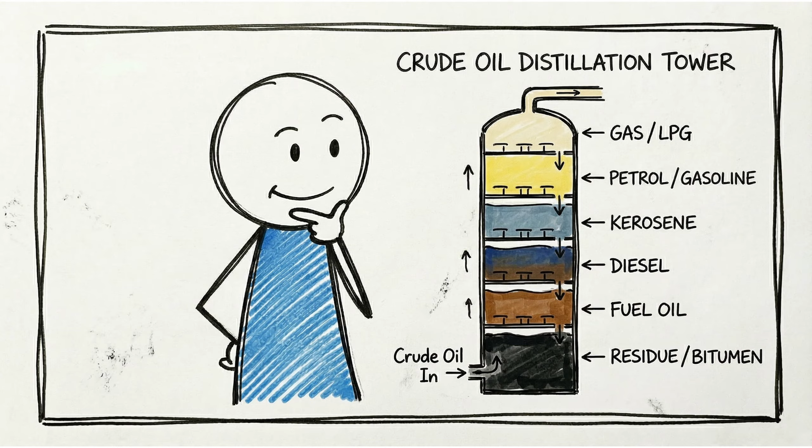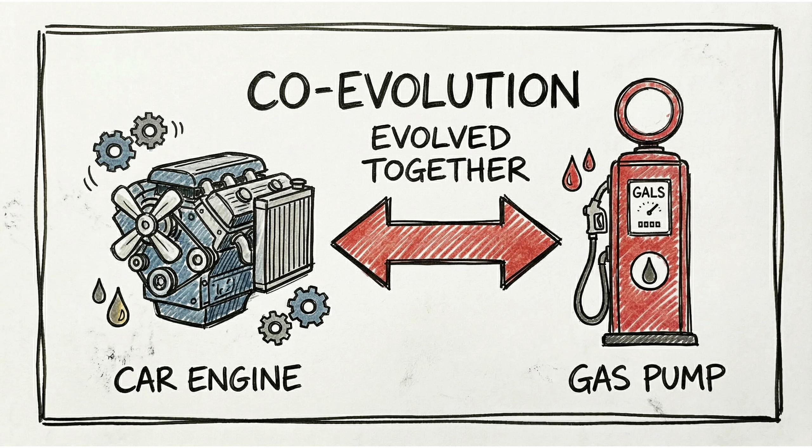Gasoline sits in the lighter range of those components, which makes it highly flammable and energy-dense. It powers the vast majority of passenger cars on the planet and has done so for over a century. The internal combustion engine and gasoline essentially grew up together, each one evolving to suit the other.

Different grades exist, measured by octane rating, which determines how well the fuel resists premature ignition inside the engine. Higher octane fuels handle higher compression without knocking, which is why performance engines often require premium grades. Despite the rise of alternatives, gasoline remains the dominant transportation fuel by a significant margin.

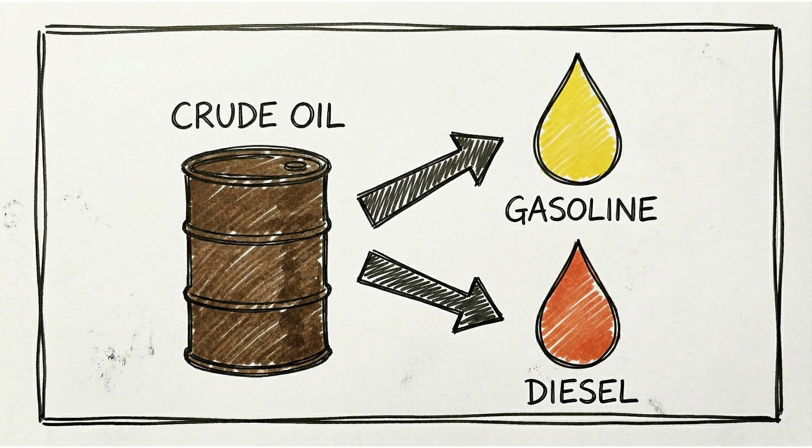Diesel. It comes from the same crude oil as gasoline, but behaves very differently. Diesel is heavier, less refined, and ignites not through a spark, but through compression alone. When air inside a diesel engine is compressed to a high enough degree, it heats up enough to ignite the fuel on contact. This makes diesel engines more thermally efficient than gasoline engines, meaning they extract more energy from each unit of fuel.

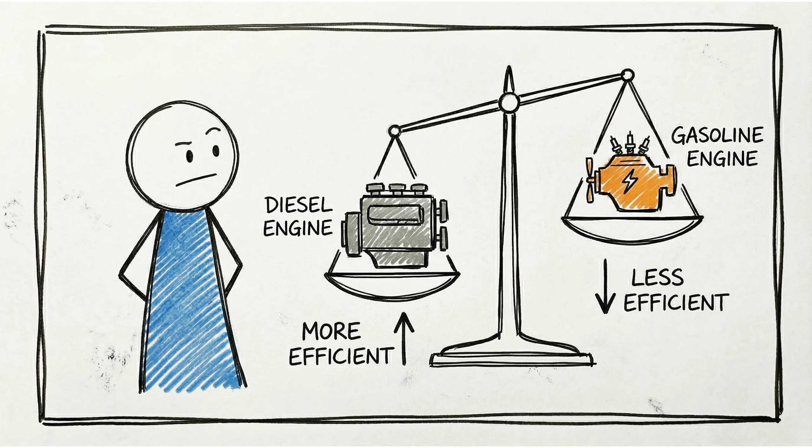That efficiency is why diesel became the standard for trucks, buses, trains, and ships, where fuel economy over long distances matters enormously. Rudolf Diesel, the German engineer who developed the engine in the 1890s, originally envisioned it running on vegetable oil. The fuel we now call diesel came later, refined to suit the engine's characteristics.

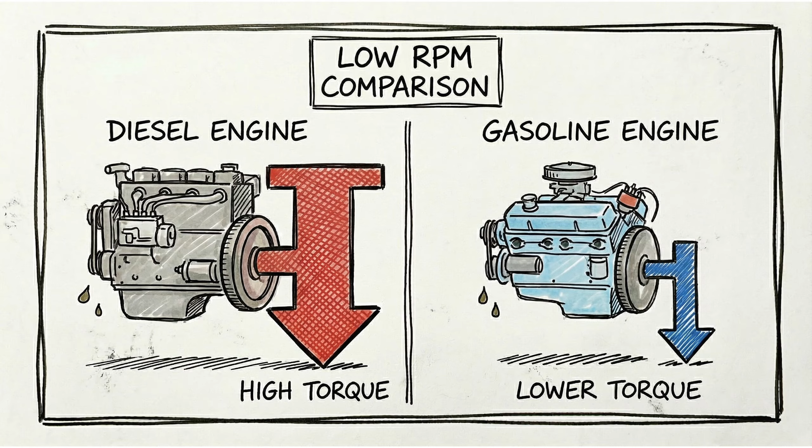It produces more torque at lower speeds than gasoline, which is another reason heavy vehicles favor it. In many parts of Europe, diesel passenger cars became extremely common before emissions concerns began shifting the market away from them.

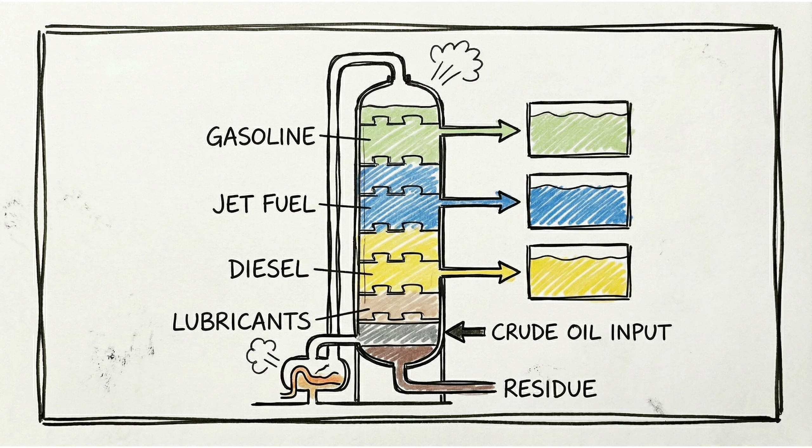Jet fuel. Commercial aviation runs almost entirely on a fuel called Jet A, a type of kerosene refined from crude oil. It sits between gasoline and diesel in terms of its weight and composition, but it has specific properties that make it suitable for the extreme demands of aircraft turbine engines.

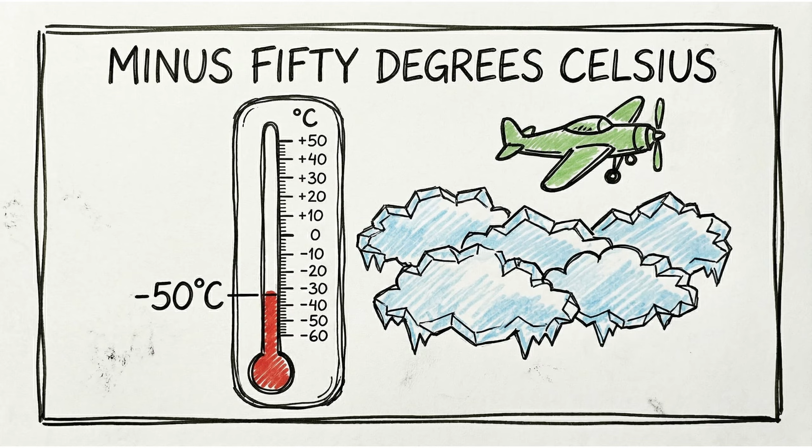It has a very low freezing point, which matters when aircraft cruise at altitudes where outside temperatures can drop to -50 degrees Celsius or colder. It is also stable under pressure and resistant to vaporizing at altitude, where atmospheric pressure drops significantly.

Military aircraft sometimes use a slightly different variant called JP-8, which has additional additives for safety and performance. The energy density of jet fuel is one of its most important qualities, since every kilogram carried on an aircraft comes at a cost to range and payload. The entire global aviation network, moving millions of passengers every day, depends on a continuous and precisely refined supply of this single fuel type.

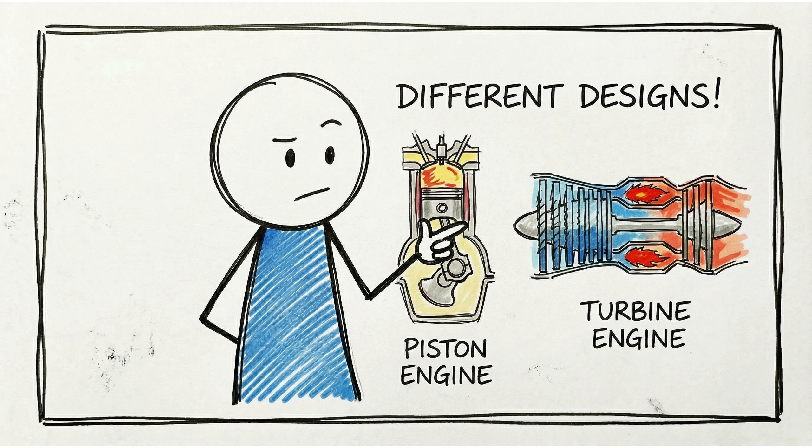Aviation gasoline. Not all aircraft run on jet fuel. Smaller, propeller-driven aircraft typically run on aviation gasoline, commonly known as avgas. It is a high-octane fuel specifically formulated for piston aircraft engines, which operate differently from the turbine engines found in commercial jets. One of the most widely used variants is avgas 100LL, where LL stands for low lead.

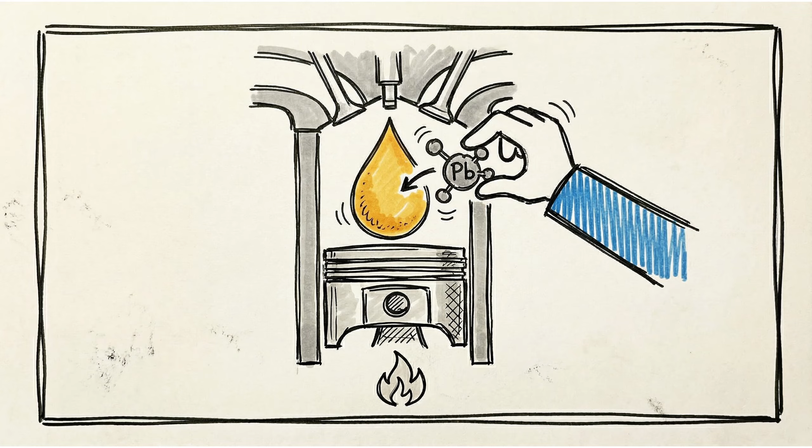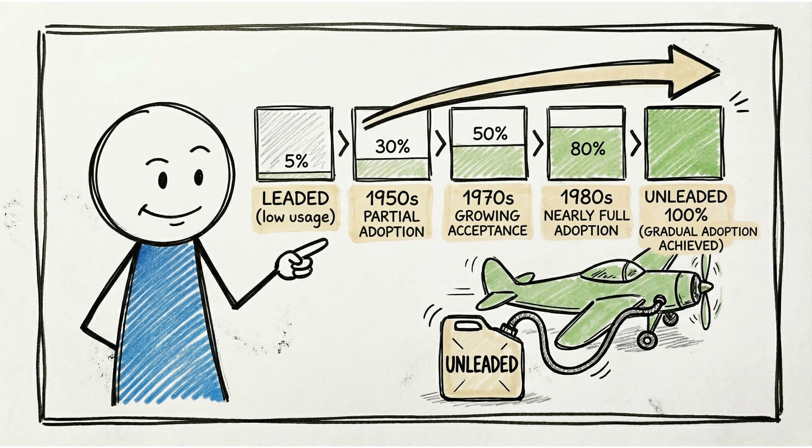It still contains small amounts of tetraethyl lead, an additive that prevents engine knock in high-compression piston engines. Lead was phased out of automotive gasoline decades ago due to environmental and health concerns, but the aviation industry held on to it longer because finding a suitable replacement that works safely across the wide range of piston aircraft engines proved technically challenging. That challenge is still being worked on, and unleaded alternatives are gradually moving toward wider adoption across the general aviation sector.

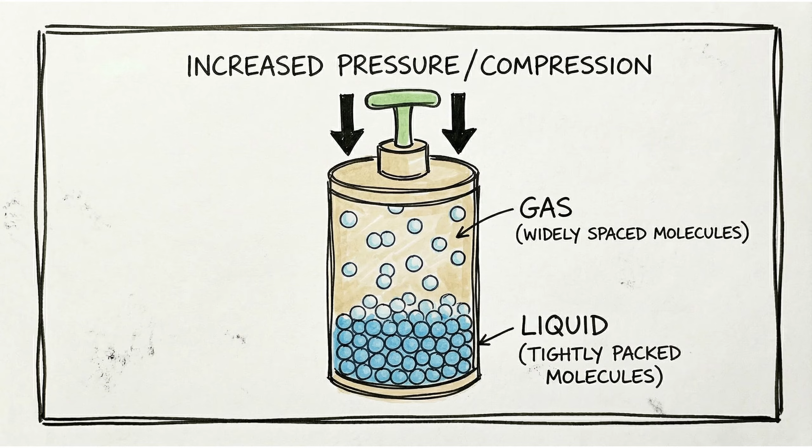Liquefied petroleum gas. Sold under names like LPG, propane, or butane depending on the specific composition, this fuel exists as a gas at normal atmospheric pressure, but is stored and transported as a liquid under moderate pressure. That property makes it practical to bottle and distribute without the need for pipelines.

Propane is widely used for heating homes, cooking on grills, and powering forklifts and other industrial equipment. Butane is commonly found in portable camping stoves and lighters. In some countries, LPG is also used as a vehicle fuel, sometimes called autogas, and it burns more cleanly than gasoline, producing lower levels of certain pollutants.

It is produced in large quantities as a side effect of other energy operations. Its versatility across cooking, heating, and transportation makes it one of the more quietly useful fuels in everyday life.

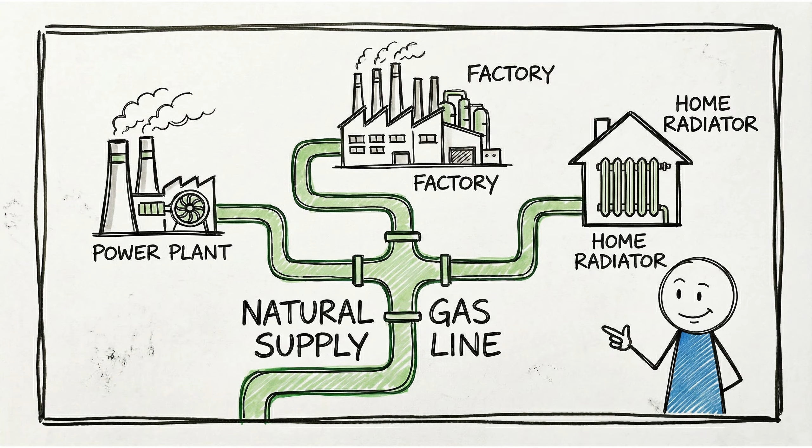Natural gas. It is found underground in vast reservoirs, often alongside crude oil deposits, and has become one of the primary energy sources for electricity generation, home heating, and industrial processes worldwide. Natural gas is composed mostly of methane, the simplest hydrocarbon molecule, which burns more cleanly than coal or oil and produces less carbon dioxide per unit of energy released.

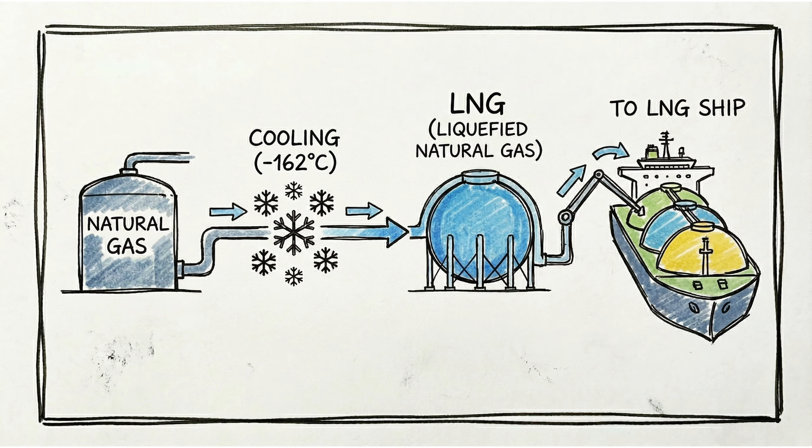It is transported through extensive pipeline networks that span continents, and in places where pipelines are not practical, it can be cooled to extremely low temperatures to become liquefied natural gas, which can then be loaded onto specialized ships and transported across oceans. Compressed natural gas, known as CNG, is used as a vehicle fuel in many countries, particularly for buses and fleet vehicles, where refueling at a central depot makes the infrastructure practical.

Natural gas became the world's fastest-growing fossil fuel over recent decades, largely because of its lower emissions profile compared to coal. Hydrogen.

It is the most abundant element in the universe and produces nothing but water vapor when burned, which makes it one of the most discussed potential fuels for a cleaner energy future.

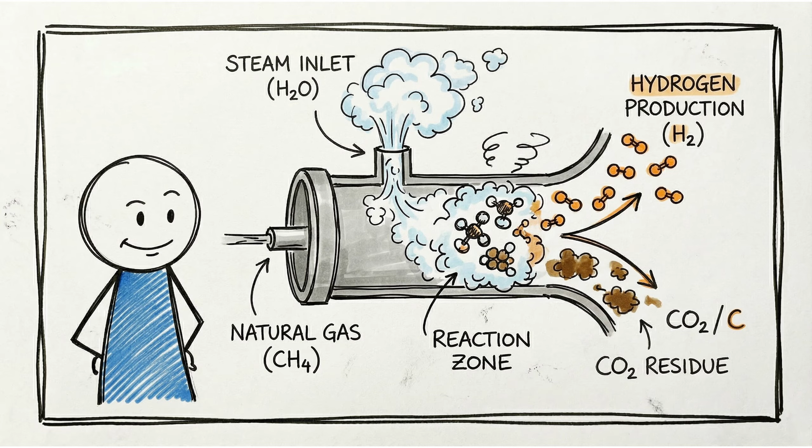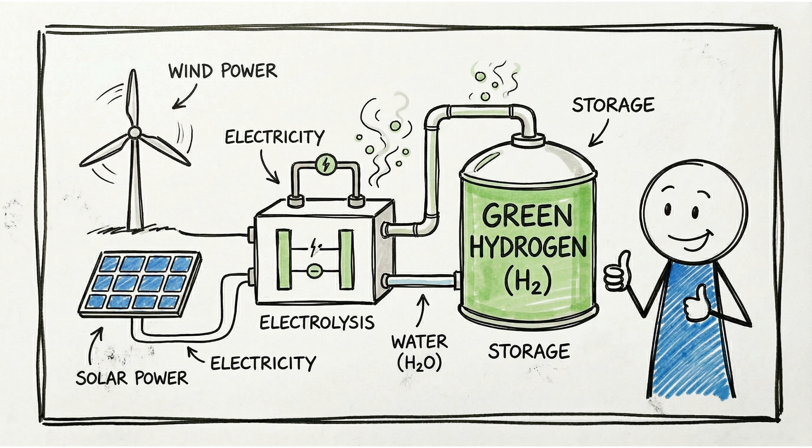Hydrogen itself does not occur freely on Earth in usable quantities and must be produced, most commonly by splitting it from natural gas through a process called steam methane reforming, or by using electricity to split water molecules through electrolysis. When the electricity used for electrolysis comes from renewable sources, the resulting hydrogen is called green hydrogen and carries essentially no carbon emissions across its production chain.

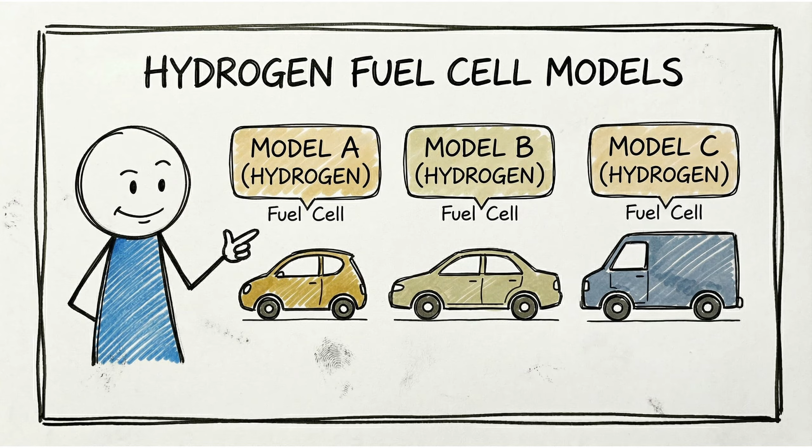Fuel cell vehicles use hydrogen to generate electricity on board, with the only exhaust being water. Several car manufacturers have developed hydrogen fuel cell cars, and the technology is also being explored for heavy trucks, trains, and ships where battery weight becomes a limiting factor.

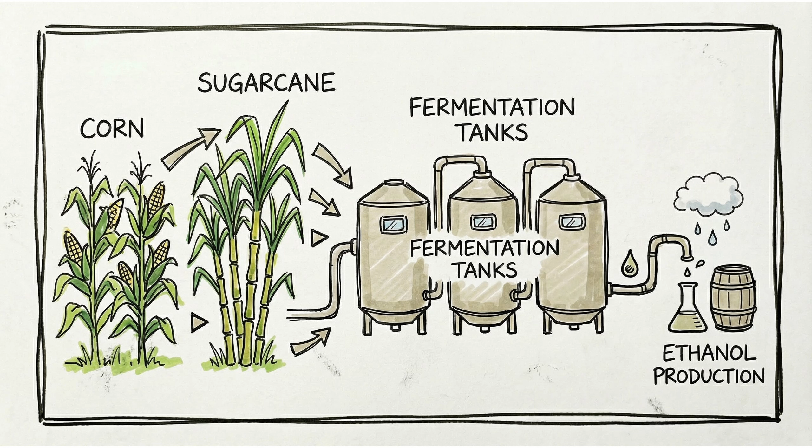The central challenge remains producing, storing, and distributing hydrogen at a cost and scale that makes it competitive with existing fuels. Ethanol: it is an alcohol fuel produced by fermenting sugars found in plants, most commonly corn in the United States and sugarcane in Brazil.

Brazil built one of the world's most successful alternative fuel programs around ethanol, and a large proportion of the cars sold there can run on pure ethanol.

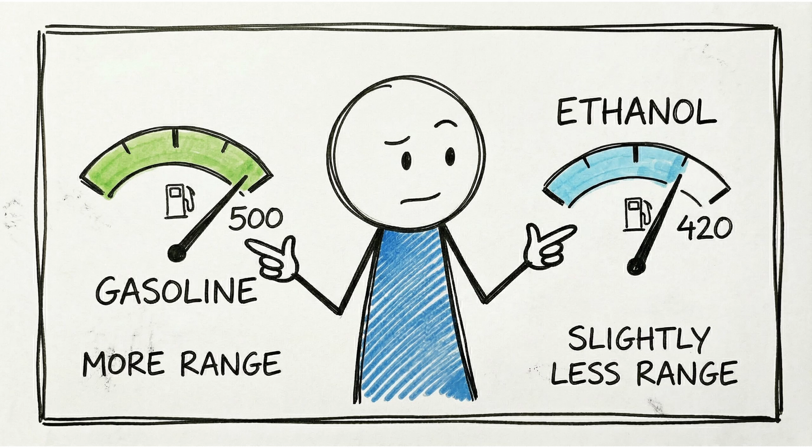In the United States, ethanol is blended into gasoline at concentrations typically around 10%, a blend known as E10, which reduces reliance on pure petroleum and lowers certain tailpipe emissions. It contains less energy per liter than gasoline, which means fuel economy decreases slightly when using higher ethanol blends.

Flex fuel vehicles are designed to run on blends up to 85% ethanol, known as E85. The fuel burns more cleanly than pure gasoline in some respects, but the environmental benefit depends heavily on how the crops used to produce it are grown and whether land use changes offset the emission savings.

Biodiesel: where ethanol replaces gasoline, biodiesel offers an alternative to petroleum diesel and can often be used in existing diesel engines with little or no modification.

It is produced from vegetable oils, animal fats, or recycled cooking oil through a chemical process called transesterification, which transforms those fats into a fuel that behaves similarly to conventional diesel.

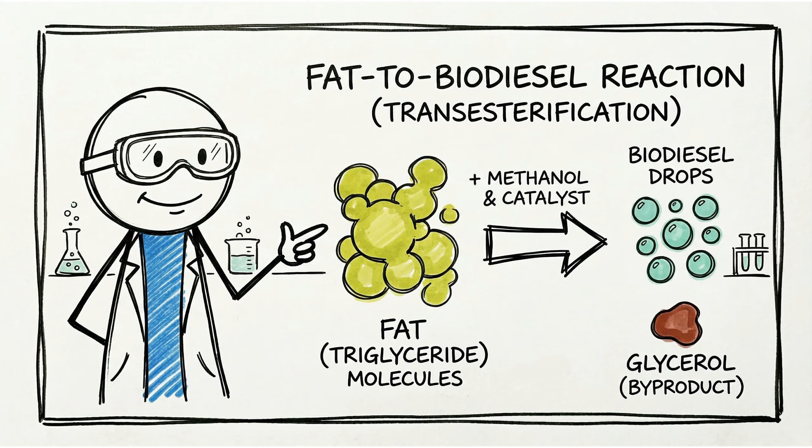Restaurants and food processing operations generate large quantities of used cooking oil, and collecting that waste material to produce biodiesel is one of the more practical circular uses of an otherwise discarded resource.

Pure biodiesel, known as B100, can gel in cold temperatures, which limits its use in colder climates unless blended with petroleum diesel. The most common blend is B20, which is 20% biodiesel mixed with 80% conventional diesel.

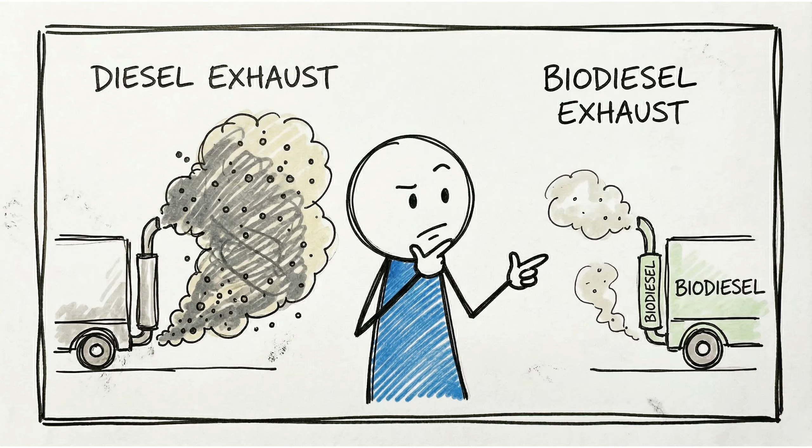It produces lower levels of particulate matter and carbon monoxide than petroleum diesel when burned, and because the carbon in the plants or oils used to make it was recently absorbed from the atmosphere, its net carbon contribution is lower than fossil fuels.

Coal: it powered the Industrial Revolution and remains one of the most significant energy sources in human history. Coal is a solid fossil fuel formed over hundreds of millions of years from the compressed remains of ancient plant material.

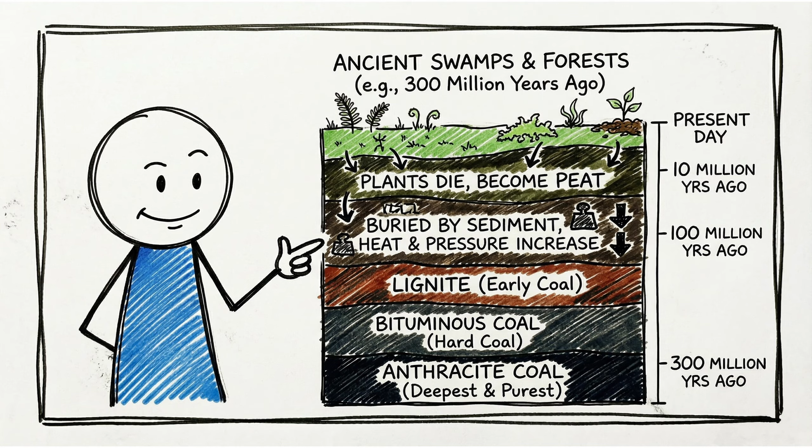It comes in several grades, from lignite at the lower end to anthracite at the highest, with the grade reflecting carbon content and energy density. Bituminous coal sits in the middle and is the most widely mined variety.

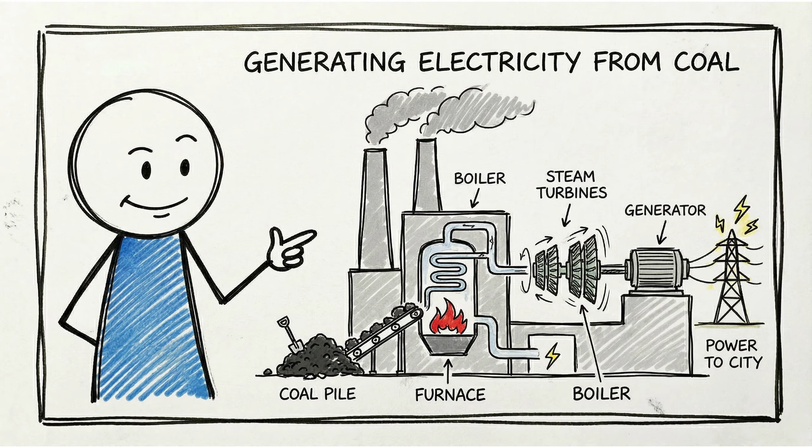Burning coal generates heat used to produce steam, which drives turbines to generate electricity, and this process still accounts for a substantial share of global electricity production, particularly in China, India, and parts of Southeast Asia.

Coking coal, a specific type processed into coke, is essential for steel production and is not easily replaced by alternatives in that industrial process. Coal's decline in Western countries over recent decades has been driven by cheaper natural gas, falling costs of renewables, and growing pressure to reduce carbon emissions.

Wood and biomass. Long before fossil fuels existed, wood was the primary fuel source for human civilization, used for cooking, heating, and later for industrial processes like smelting metal and firing ceramics.

It remains the main cooking and heating fuel for a significant portion of the global population. Burning wood releases carbon dioxide, but because trees absorb carbon as they grow, sustainably managed wood fuel can be considered roughly carbon neutral over time.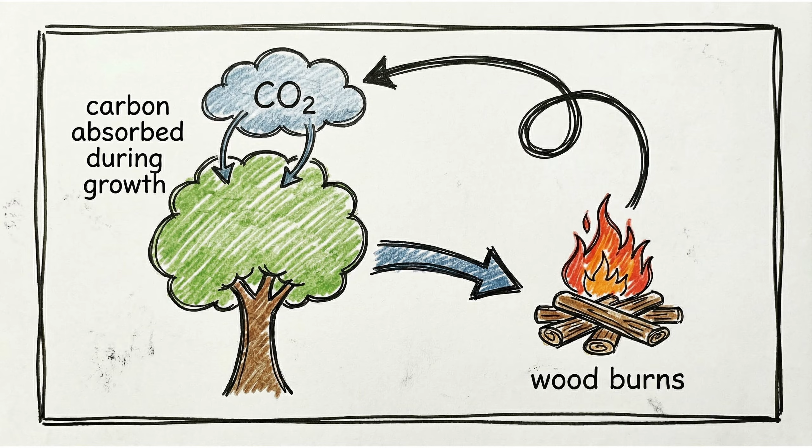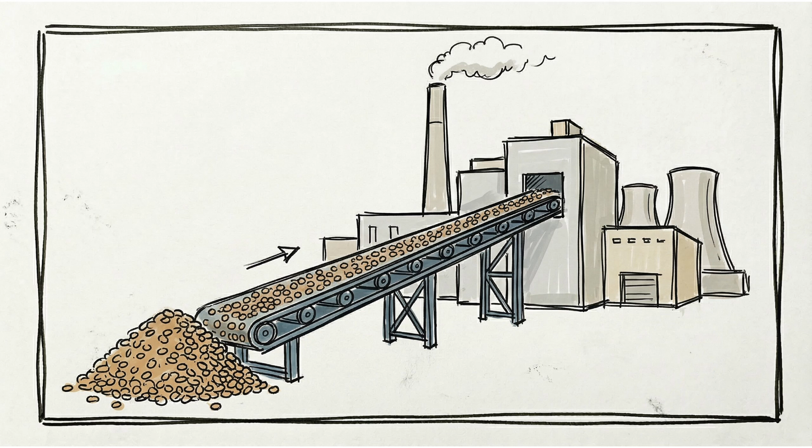Beyond simple firewood, biomass as a fuel category includes agricultural residues, dedicated energy crops, wood pellets, and organic waste. Wood pellets in particular have become an industrial fuel used in large power plants, particularly in Europe, where they are sometimes co-fired with coal or used as a direct replacement.

The sustainability of large-scale biomass use remains a point of genuine debate among researchers and environmental groups.

Nuclear fuel: it does not burn in any conventional sense, which sets it apart from every other fuel on this list. Nuclear fuel generates energy through fission, the process of splitting heavy atomic nuclei, most commonly uranium-235 or plutonium-239, releasing enormous amounts of heat in the process.

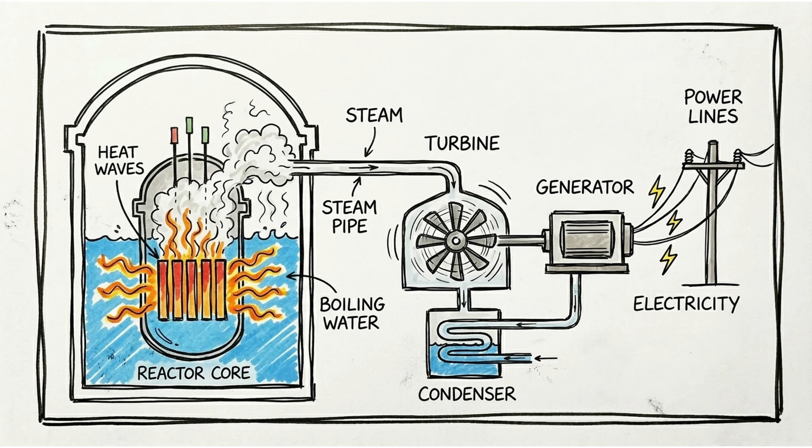That heat is used to produce steam, which drives turbines to generate electricity, similar in basic principle to a coal plant, but without combustion and without the associated emissions during operation.

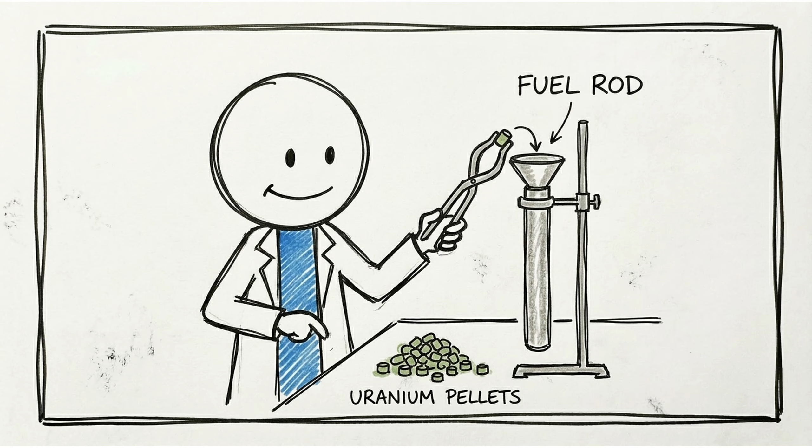The fuel itself is processed into small ceramic pellets of uranium oxide, which are loaded into metal rods and assembled into fuel assemblies inside a reactor core.

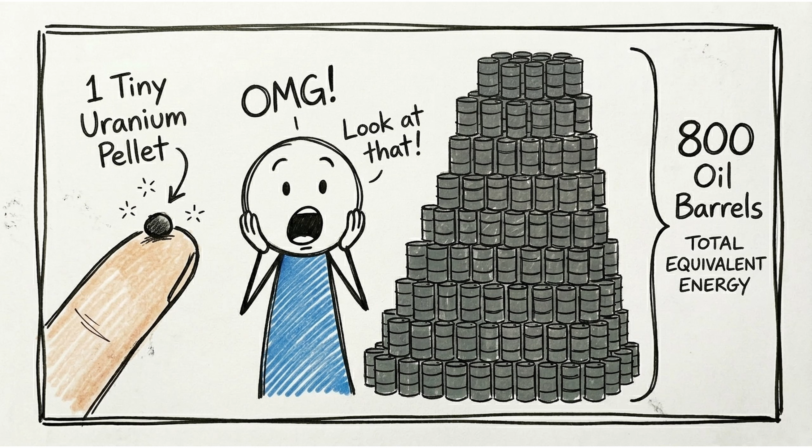A single uranium fuel pellet, roughly the size of a fingertip, contains as much energy as around 800 barrels of oil. Nuclear power plants can run continuously for extended periods on a single fuel load.

The challenges surrounding nuclear fuel relate primarily to the handling and long-term storage of radioactive waste, which remains active for thousands of years.